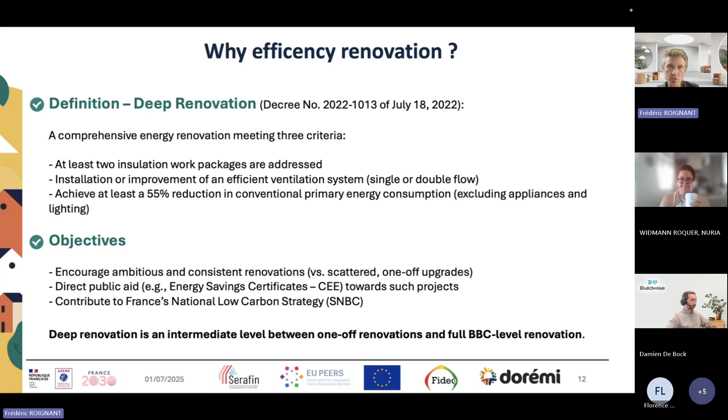Okay. So on slide 14, you have the definition of the one-off renovation, which is the largest gesture work done for the moment in France. For example, it's just changing windows, insulating, or replacing a boiler, but without a global reflection on the work we have to do to reach very high efficiency. Okay.

For DOREMI, we are not very pleased with this definition because we have a study with ADEME, a French institution, in 2020, which shows that 80% of one-off renovations are not capable of improving the DPE by more than one level, which is the scale of evaluation of improvement, and only 5% reach the BBC level or equivalent.

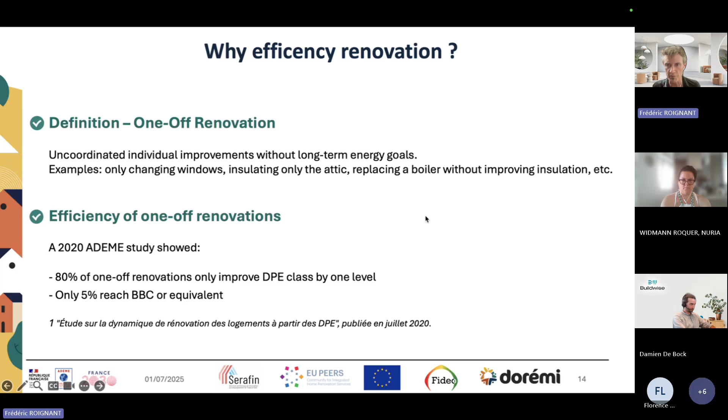Okay, so at the end of the day, we see that one-off renovation work is not the one which has to be continued or supported to reach the climate level in 2050. Okay.

Okay, so why do we talk about efficiency in renovation? As you can feel today, it is because we are facing global change, climate global change. But more than that, we have seen that we will face social goals also. We have a big amount of people in energy poverty in France.

And working to improve efficiency in renovation will create local and non-relocatable jobs here in France and in every country, supporting territory development. Okay, so besides the climate goals, we also have social and economic goals, and surveys show that we can expect about 8 million energy... Sorry.

Okay, I'm lost in my slides. Sorry.

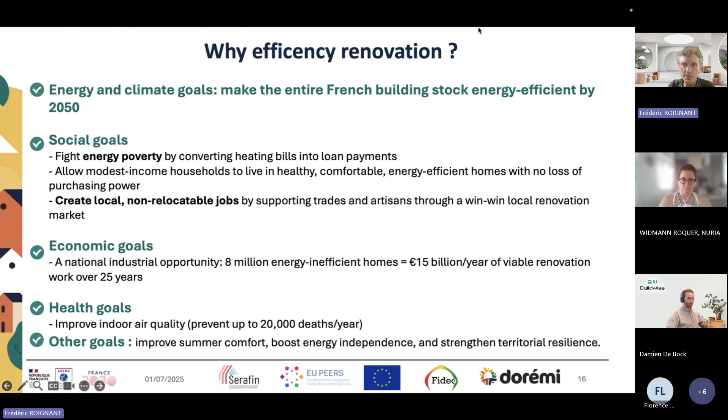Yes. Okay. The word is we have an opportunity for economic industrial development, and you've got figures for the 25 coming years. And also there is a point. This is health goals, because we know that we've got poor air quality in homes today. Okay, so this is the major point because we are dealing with efficiency renovation today.

For DOREMI, the word is we want efficiency renovation to be accessible for all people when it's well planned, optimized, and well managed. Okay, it is not just for people who have good revenue. Okay, so we need to regard financial planning and project coordination to ensure that we will succeed in this work. So for us, efficiency in renovation is you get good health quality in the home, you have comfort, and you consume very little energy.

Okay, so now chapter 2. It's not sufficient just to talk about energy in a home, in a renovated home, but we want to be sure that the energy performance is real when the work is done. Okay, so we will see how we are organized in DOREMI to achieve this goal.

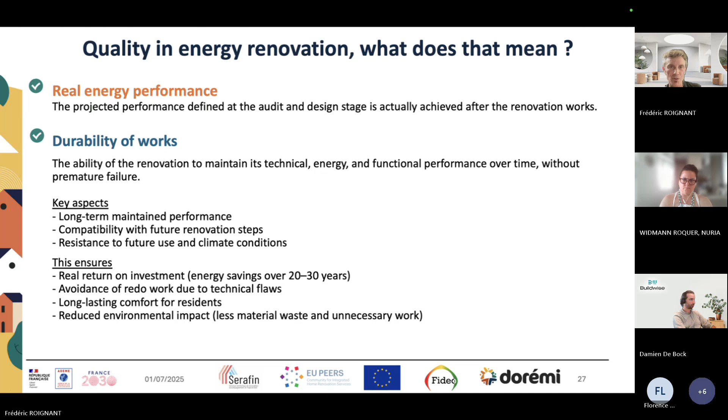Sorry, there is a title in French. See, this is what quality in renovation is. So for the user, it means first of all comfort and a healthy residence. We know that 30% of our people talk about difficulties during cold winter to be okay in their home. Okay, and we see there's an increase, because in 2020 the figure was just 14%, sorry.

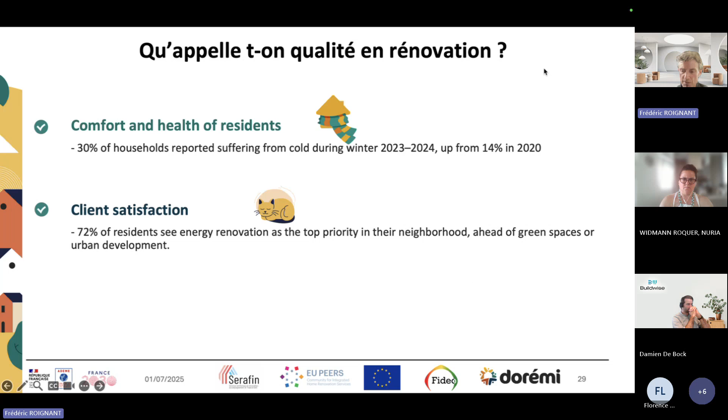Another point is satisfaction from the point of view of the user. For them, this is the first priority, coming largely before other aspects like green space or urban development. So this is a very important point. Next one.

So let me talk about DOREMI in just a few words, for you to understand how we are organized. We are part of a larger group, which is the Negawatt group. We were born in 2017. We are coming from Negawatt Institute, which is a kind of think tank thinking about transition from a global point of view for France, energy and environment, and changing society's way of thinking. And the point is DOREMI has been created to face the demand for renovation in essentially old houses. Okay, we are independent, but we are also funded by great companies like Schneider or Edilians. Okay.

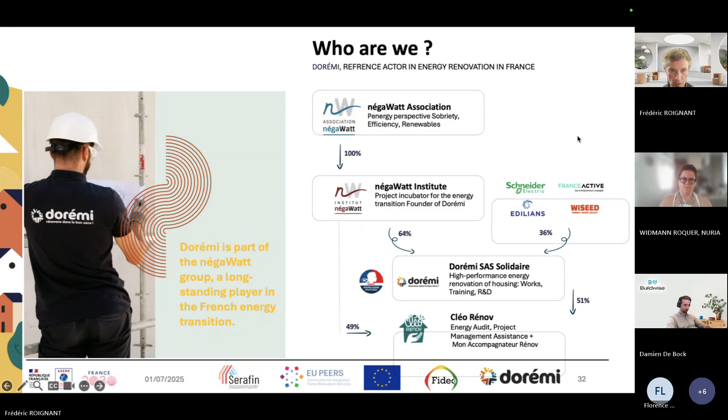Next. The strength of DOREMI is we are organized in 3 major parts. Here I am talking for DOREMI formation, which is training, one of the 3 pillars of our organization. We also have the lab. The lab is the people thinking about and dealing with research themes with partners, French and European. And we also have DOREMI work, which is the field way of doing renovation, high quality renovation.

So we are working all together day by day, and this is the strength, because the innovation put forward by the lab is trained to craftsman groups and finally leads to a good renovation project on the field. And this is very particular to the framework, and I'm not sure there are lots of companies organized like this in France. Okay, and moreover, in 2022, we developed Cleo Renov. We deal with how to get public funding for renovation. Okay, but it's a bit apart because it's not allowed by regulation to do all the work in just one company.

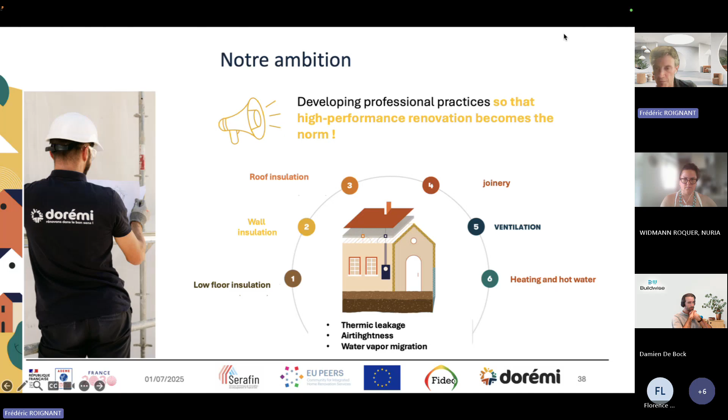Okay, and this is very specific because this way of thinking the renovation is not very shared by lots of people here in the field, in reality. Okay, so let's go deeper in how we are organized to do that. Let's talk about pillars of quality. It's like many proofs of quality. So let me explain one of them.

Based on this scheme, we can reach high performance energy renovation in 2 ways. The first one, and the major one up to this time, is the project in one step. Okay. It means we will find fundings, technical solutions, and without any blocking from houses. Okay, these are the 3 conditions which make it possible to do high performance renovation in one step.

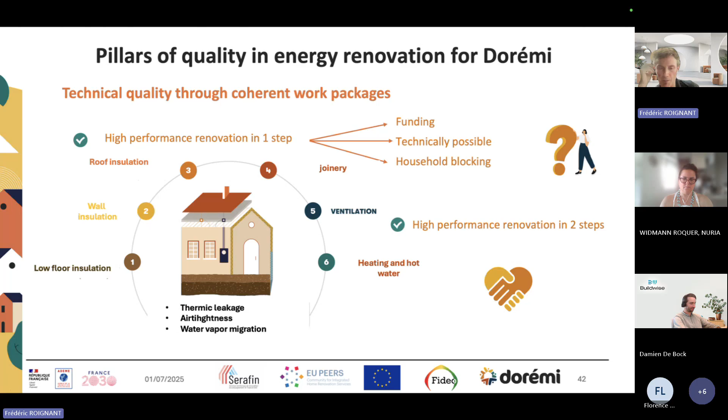Okay. There is some French inside. So I don't know why.

Another goal is to ensure our partners that DOREMI is still engaged in high quality renovating and not just going to say, okay, it's not important, let's do 3 or more steps and we will see what's going on. No, it's not okay for us. So this study, at the end, showed that it's possible to do it in 2 steps. Okay.

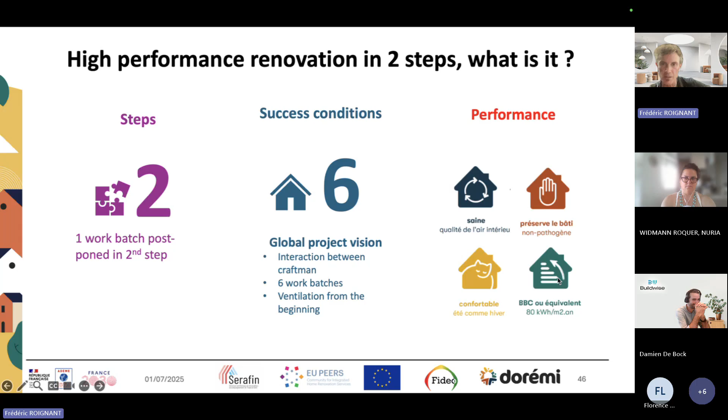So if we want to sum up the conditions to have performance in work in 2 steps, we will say that we have the 6-pack of work plus the interaction between craftsmen, which is very important to ensure quality. And we know that we have to treat the ventilation from the beginning because, with its network, it's more difficult to do the work at the second step. And if we have these conditions, we know that we can reach the same performance as if we do the work in 1 step. Okay.

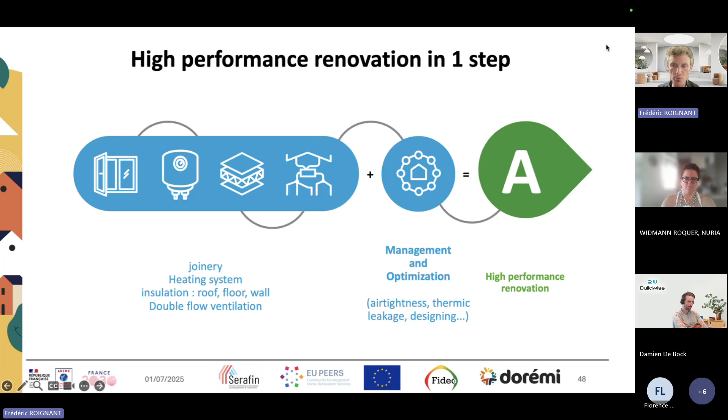So another scheme. So the conditions to get high renovation performance in 1 step are these ones. So this type of work: joinery, heating system, insulation, double flow, and 3 more things: air tightness, thermic leakage, and designing.

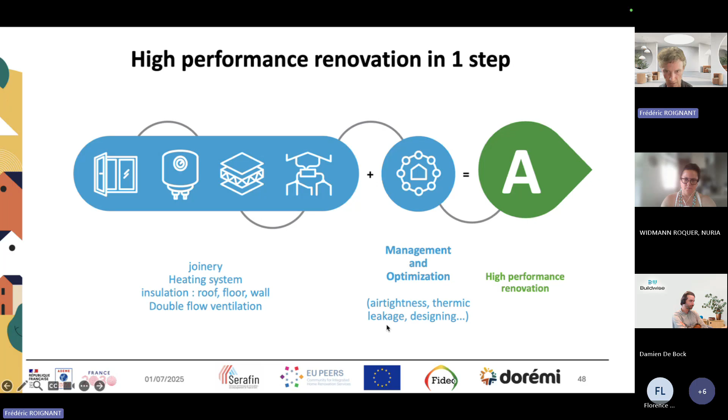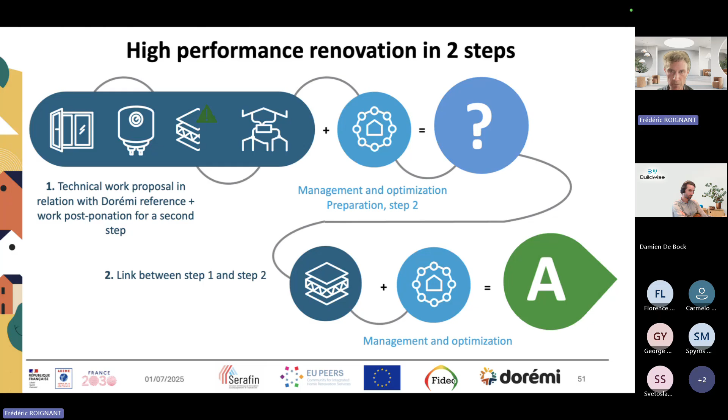And if we want to do the work in 2 steps, we'll go with some work. And after, we have to optimize and make it possible to do the complementary job in step 2. But we have to deal with it and design it from the very beginning of the project. Okay. So it's more complicated, but it's possible to have the same result at the end. Okay.

Do you have any questions at this stage? Do you need to make a little pause or something? Okay, so if it's okay for everybody, let's go on with another point of quality for DOREMI.

The thing is, if we want to have quality, we have to have a look at the global landscape of performance actors. And to ensure we have good actors, we decided to train them from the beginning. So we designed a training program for enterprises, which generally are more like craftsmen groups of 2 types of small enterprise. And the goals are to make them progress on professional practice and also create the conditions to work together and to be okay with the global methodology of DOREMI.

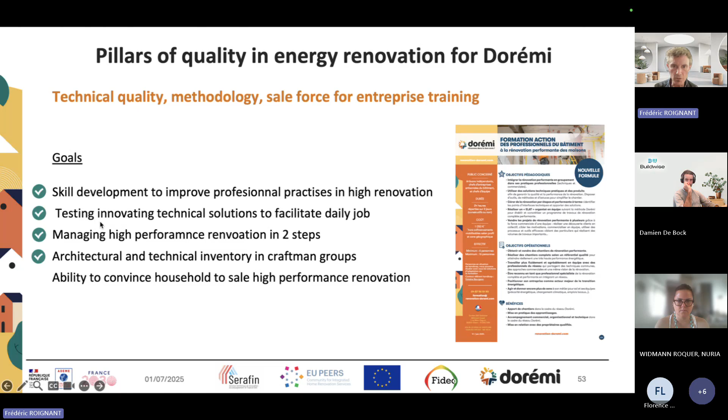Okay. So this is a very short program, just 3 days, like a more academic training program here in Valence or in regions. And after, there are some experts who are close to them for about 1 to 3 work projects on the field. And we also have the same kind of training program, but for experts who are going with them during the beginning of the collaboration with the craftsmen.

We know experts, but they are also trainers. So this one is a 4-week program. We talk about training, teaching postures. How do they have to face the craftsmen, the household?

And we talk about the way of teaching and the way of managing a group of craftsmen, and sometimes it's not very easy. Okay, and obviously we talk about also technical expertise, sales, and organization.

So this is another point. We talk about training for enterprise, for teacher, they go with craftsmen, but we also have an organization for household because they want to have someone to talk with during the project from the beginning to the end. So we have a commercial offer which takes them from the very beginning at the first contact by phone to the reception of work, usually about 10 months or more collaboration.

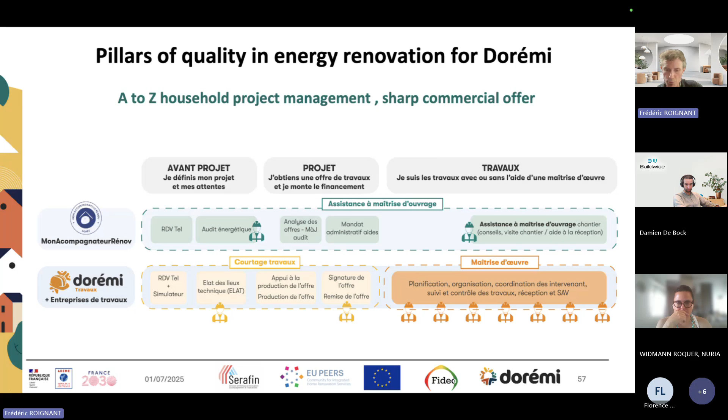So on these schemes, you got, sorry it's in French, but just to show you the different stages, and there are numerous, we have to be present with household. It's not an easy job, but it's very necessary to go into quality at the end.

So the first one is designing a pre-qualification program in collaboration with household. Then after, the trainer goes with the craftsman group to design a technical and financial estimation for the work.

Then after you have the step where, after the project is signed, the craftsman group makes the work together, but they are guided by the trainer and the expert from DOREMI.

Before the end of the work, we have the very important stage, which we call the N50 test. It is the way to show that the airtightness is good or not sometimes, and it is the time we will discuss if we need complementary work or not to reach the quality expected.

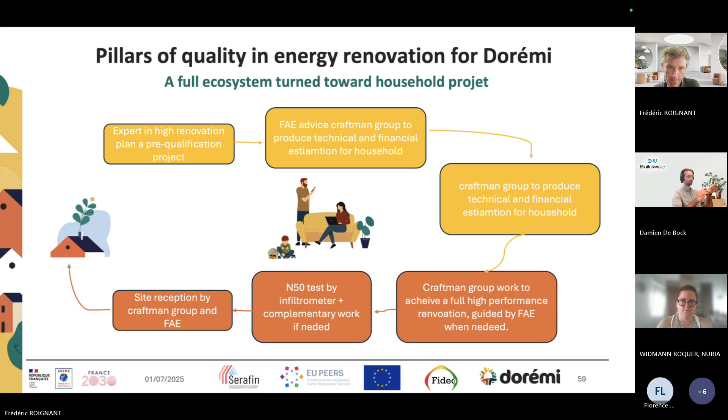And finally, the last step is the reception of work by the whole craftsman group and the trainer.

So this slide is just to show you the major steps for project renovation from the point of view of the user, the household. More or less, it is the same meaning as the coming slide, so I'm going to be very fast on this one.

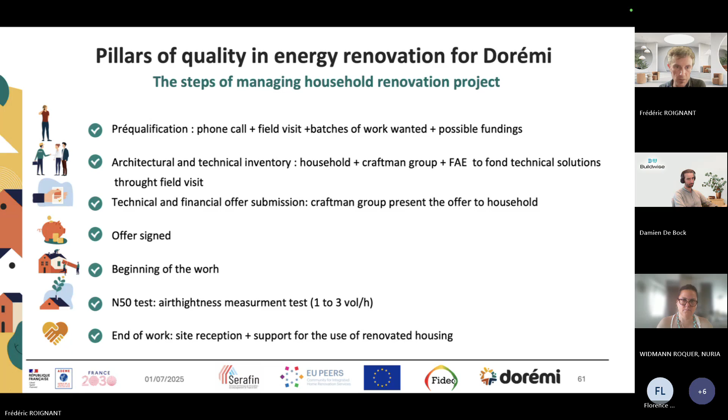And now I'm going to present you another tool at the service of quality for the benefit of the household. It is the internal reference grid, we call it référentiel DOREMI, for the high quality performance. So this is the first page of this document.

And what is inside? Inside we have, we want to have a grid just to make energetic designing simple. So in this grid, you've got about 13 ways of doing efficiency, high performance renovation, according to the choice you have to make in type of work.

For example, you begin on the left with insulation of wall, then after you have airtightness, then ventilation, joinery, and insulation. See, this is a combination of what is possible in work. Then when you go on the right, you just have to follow the line, and after you reach a number of solutions.

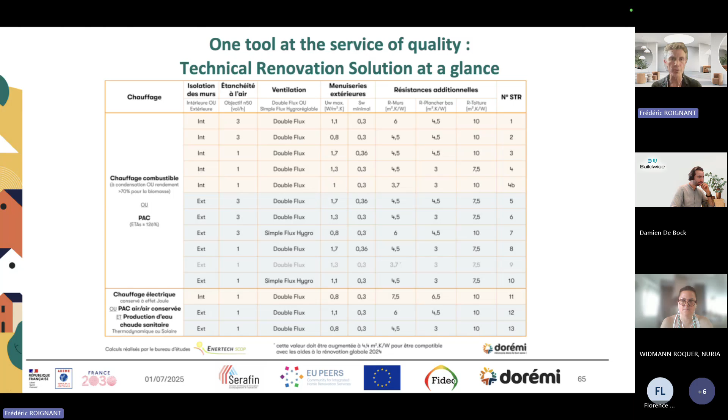Which is a pre-thinking way of designing the project. So we don't need to do any long study on thermics for this particular project. We know that in this kind of condition, we can reach a BBC level, a low consumption for houses, just by doing this grid, more or less. So it is a way to stay simple in the way of engaging work, and this is also very useful to talk with the household.

Okay, so another major point for DOREMI is it's not just designing quality on paper, but the quality is made also because we are present at each stage of the project. So these stages are: before the craftsman group makes the proposal to the household, we have control. Before the engagement of household, we have a control. During the work, we have the control, and one of them is the N50 airtightness test. And we also have control many times during the work.

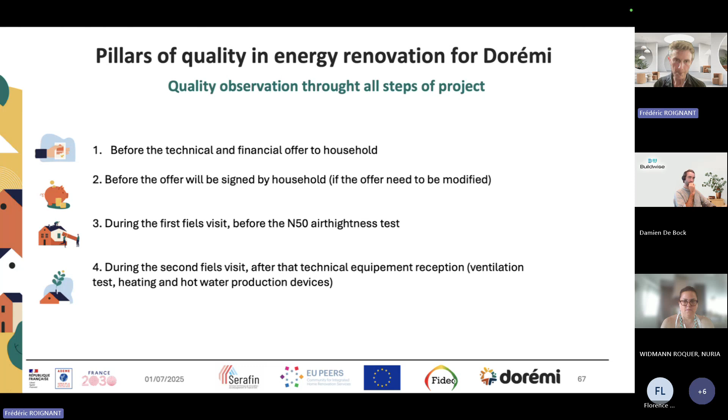And just to show you a tool we use to make the control, we developed this grid directly linked with the référentiel DOREMI of high performance. And for the expert, they follow this grid at each step of the control, and they make control iteratively, times to times. So they have the capability, the ability to show the progress on the work of craftsmen.

We also got an intern software to follow up the project. As you know, we are spread across 5 regions in France, so we have numerous projects at the same time. We need to be very organized to know what's going to happen, who the projects are, and where they are, to make adjustments if needed. This software, called L'Appli, is an intern software, but I want to show you how we are organized.

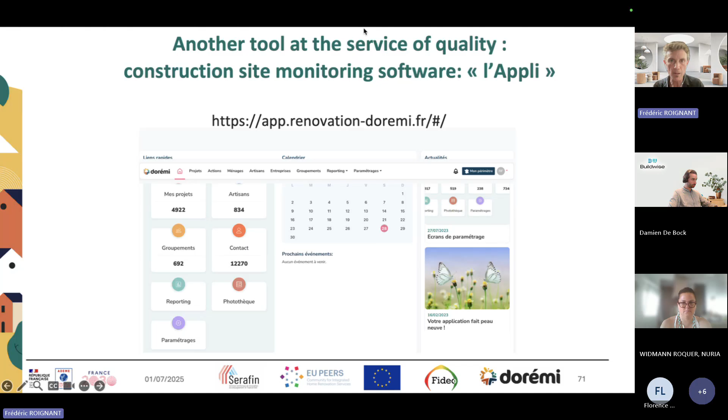Okay, sorry, let me try to make a jump to this software, if it's possible. I'll share it with you just after. Okay, where is it? Tick-tack, tick-tack, here. Just a few moments please. Okay, so it doesn't work. No.

Okay, here we are. Let's try, I'm not very good with sharing documents. Do we see something different than before? Yes? Yes, it's perfect.

Okay, thank you. So here you've got the project. I'm not going into detail, just a quick overview of the software. This is the list of projects we are dealing with at the moment. I'm choosing this one, so you can see the organization.

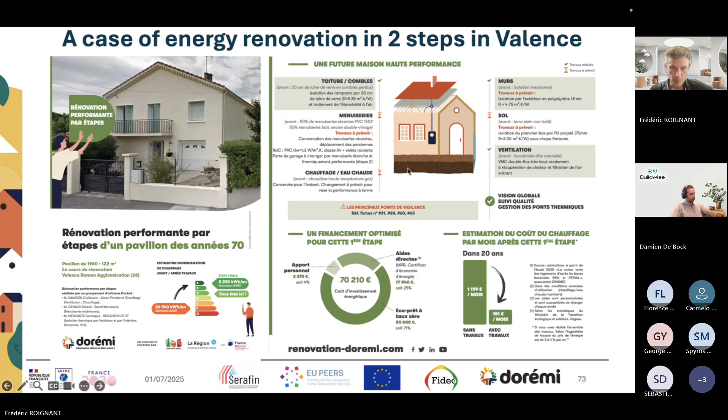And here you've got the detail of the type of work designed for the first step in black, and in red for the second step. So we're in a case where it wasn't possible to do the renovation work in one step. This is a document discussed with the household, and if needed, there are references in red, referring to a technical guide they can consult if they need to go deeper in understanding the technical work they're going to have.

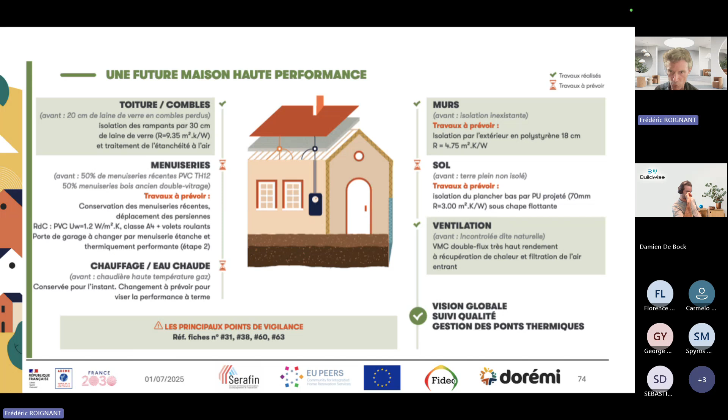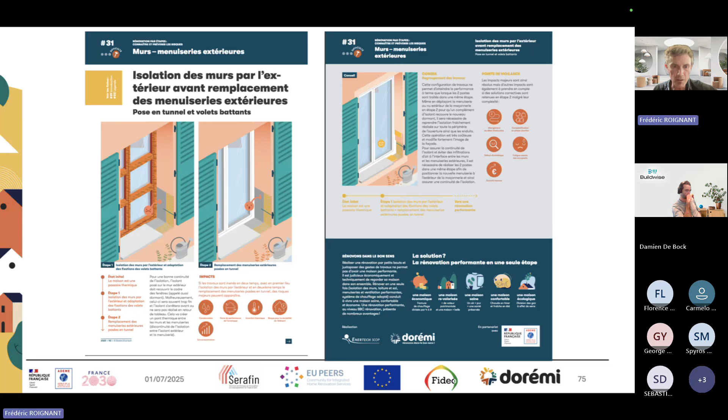So for example, these guidelines are like this. They're free on the website, you can download them for free. There's a version for the household, and a version for professionals. This one is for joinery, this one is for insulation in one typical case.

At this point between wall and floor, you've got another type. You can search by a number that links the website guideline to the document I showed you before.

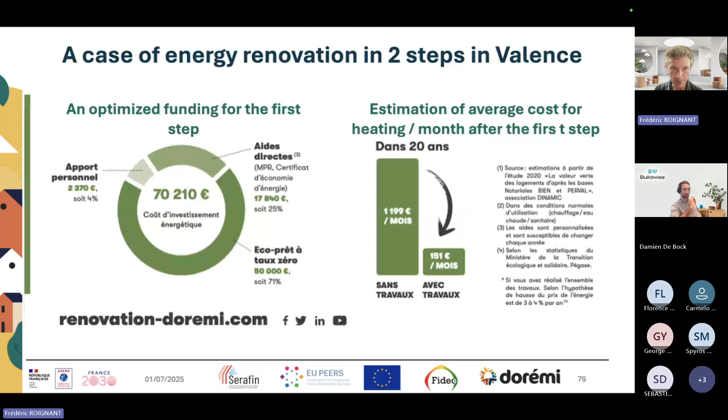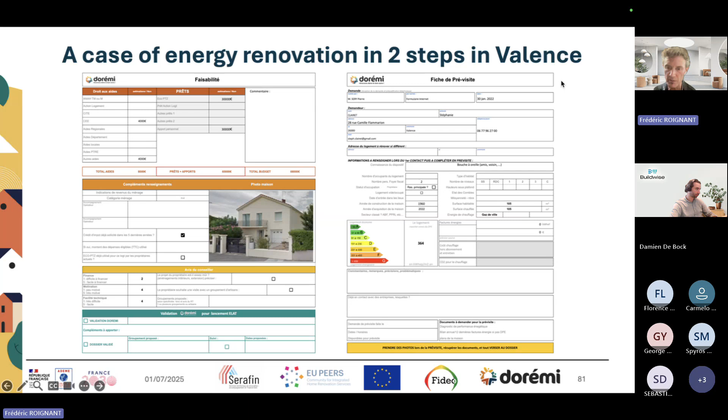This is the same but bigger. This is just to show you we have an intermediate grid to get a view at the beginning of the project of what is designed, and this is the first step to share with the household what is designed for their house. It's a way to communicate and to bring them on board, to get them moving through the project.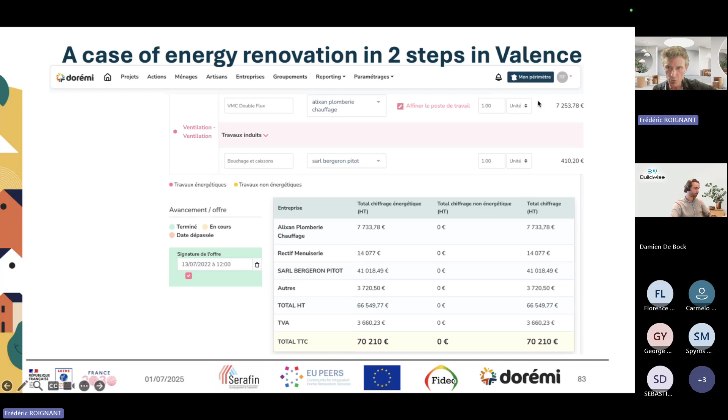Okay, so just figures coming from the software, L'Appli, that I showed you before. This is the same, so I'm going fast.

Now I can deliver you some results of the global way of doing work at DOREMI. We have an intern survey to stay close to the market, concerning the years 2022 and 2024. The first figure is that single-step renovation is still largely more numerous compared to two-step renovation work, about 75% for the first one. The average surface of houses we work with is 120 square meters.

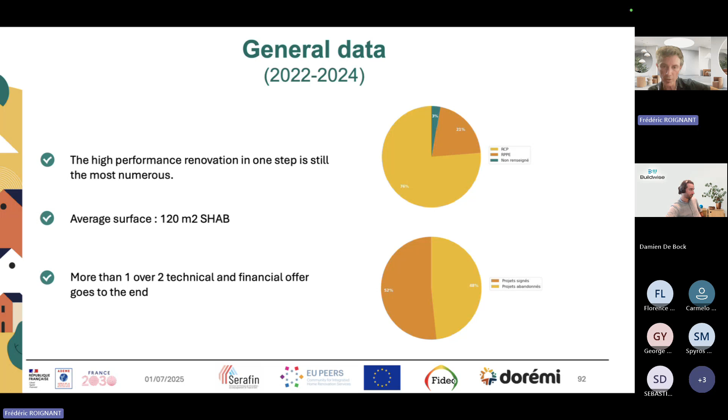We got a good transformation rate between the step of technical and financial proposal and the realization of work. This figure is very important for craftsmen because they are more or less sure to have the work when they go with DOREMI.

Now let's look at the reasons why sometimes we can't do the work as expected. The first reason for abandoned projects is failure on the budget side, about 30% of the whole. The public we work with, for the most part, is what we call modest or below revenue, coming from a grid spread by ANAH, which is a French regulation agency. So we are not working just for rich people.

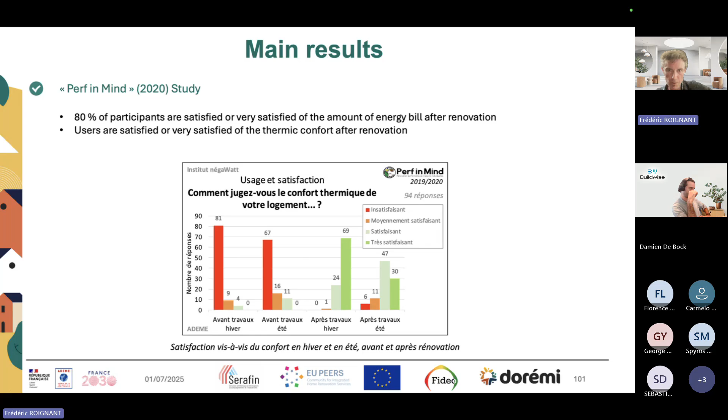So globally, these figures reveal a global approach of satisfaction for households in this campaign. About 40% are very satisfied with the quality of work during the campaign.

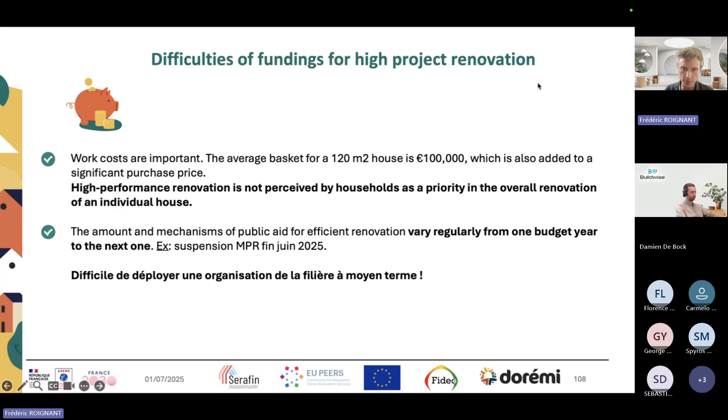We also have difficulties linked to the enterprises themselves. Globally, if we take a global look, they are poorly trained, and they are not very motivated to improve their skills through academic programs. We had some studies showing that more than half of companies are too busy and not very confident in the business opportunity, so they don't want to engage in a training program.

In France, we have the RGE label, which is the basic step to be trained for high-level energy renovation. And just 10 to 15% of companies go for this RGE label, which is very few compared to the number we need to reach the global climate goal in 2050.

What can also be said is that, from the point of view of craftsmen, it's very difficult to work as a group because they don't know each other. They don't have any time to exchange together. It's difficult to share the same way of doing the job, to plan their interventions and coordinate the work. So they are not very keen to go into this way of working. And this is a challenge for us.

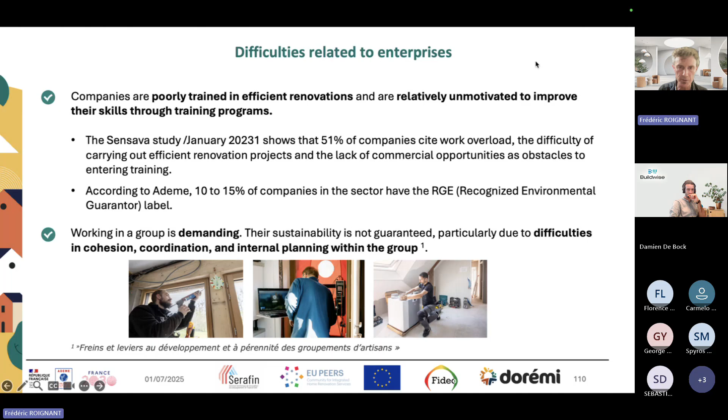So what's going to be in the future? Prospects for development. We are working on rewriting our renovation toolkit. The goal is to make it more friendly to use on the field. So this is a guideline to be used by craftsmen on the field. This is an internal process of DOREMI, just to make it easy to use for people on the work.

For training, we want to develop more operational training on the field, because they don't want to leave their tools. They want to stay focused on the field work. So we have to develop this kind of training. We can also push the diffusion of return of experience, just to deliver a very deep message to the craftsmen.

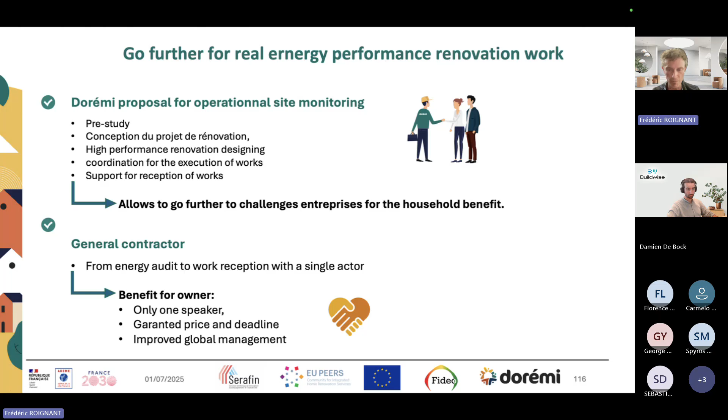And also, we have experience concerning professional skill development, because we train more than 1,000 people a year. More than that, we have an integrated, reproducible approach, centered on the user, with a lab research pool, with the changing way of thinking with Institut Negawatt, with Cleo Renov, which is the structure to help fund the projects, and with work dedicated to quality observation.